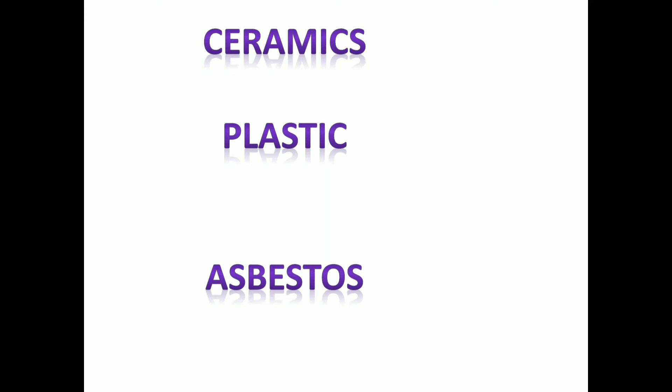In this video, I will be covering certain miscellaneous building materials used in the building industry. That includes ceramic, plastic, asbestos. First of all, coming to ceramics. Ceramics are the articles that are made by potters or the articles that are made from potter's earth. They can be clay products, refractories, or glasses. Glasses we have already completed in the last video. So let's start with the clay products.

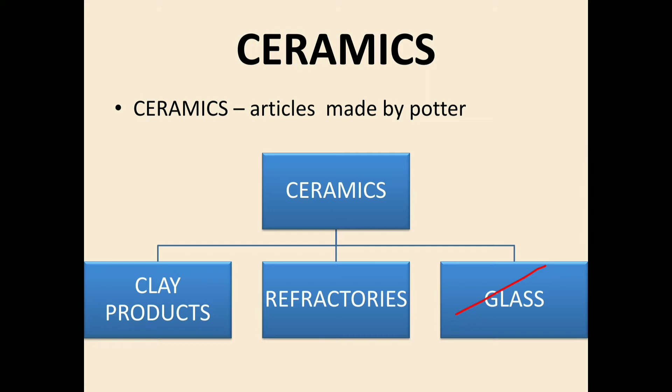Clay products include tiles, terracotta, earthenware, stoneware, porcelain and bricks. First one is tiles. We know it is used for various purposes in the building industry. They are thinner than bricks. The manufacturing process is somewhat the same as that of the brick. That means the first process is the preparation of clay, for which we have to select suitable clay which is free from impurities like grit, pebbles, alkalis, etc. They are taken to the pug mill and then they are ground well and made to suitable plasticity. Then for the process of molding, they are placed in molds that have a definite shape and pattern.

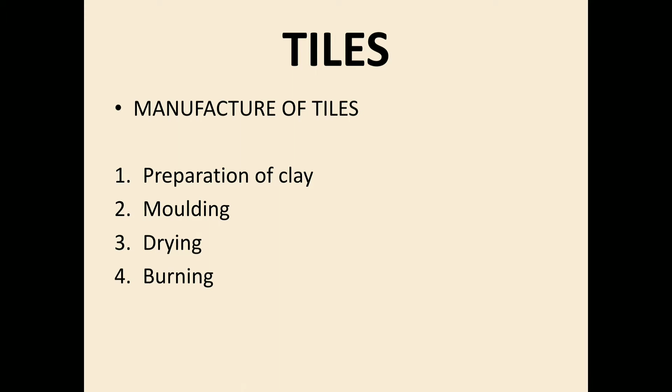Next process is drying. If you are naturally drying, it will lead to least warping of the tiles. Last process is burning. Burning is done in kilns like in the bricks. The tiles that are obtained after the manufacturing process should not have any cracks or any bends. They should be well burnt and have a uniform color. Coming to the types of tiles, first one is the drain tiles, that are used in drainage pipes as a lining, or sometimes used for irrigation water pipes.

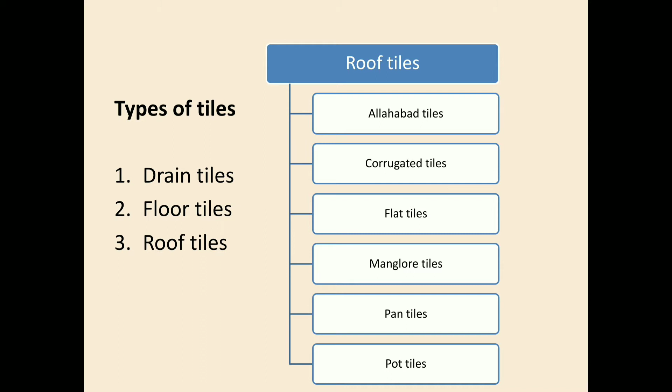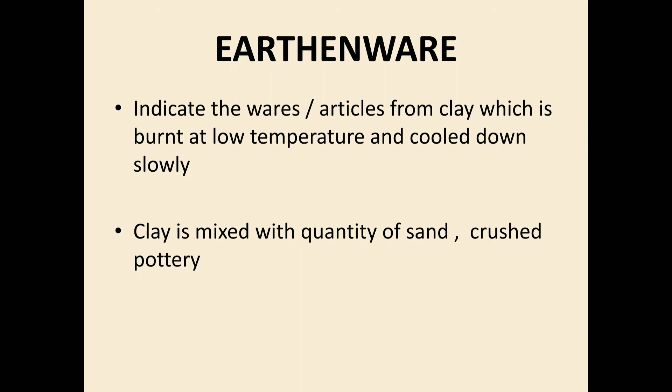Next one is the floor tiles that have a thickness of about 12 to 50 mm. Next one is the roof tiles that are used over the pitched roofs of houses or buildings. Roof tiles are of many varieties: Allahabad tiles, corrugated tiles, flat tiles, Mangalore tiles, pan tiles, pot tiles, etc. So that was about the tiles. Next one is earthenware. These indicate the wares or articles from clay which is burnt at low temperature and cooled down slowly. Usually, for making earthenware, clay is mixed with sand and crushed pottery. This will prevent the shrinkage of clay on drying and burning.

Next one is terracotta. The word terra means earth, cotta means baked. So terracotta means baked earth. It is a type of earthenware also. Its manufacturing process is the same as that of the tiles. The major use of terracotta is making hollow terracotta blocks that can be used for ornamental works, and sometimes it is used as a substitute for stones for decorative purposes.

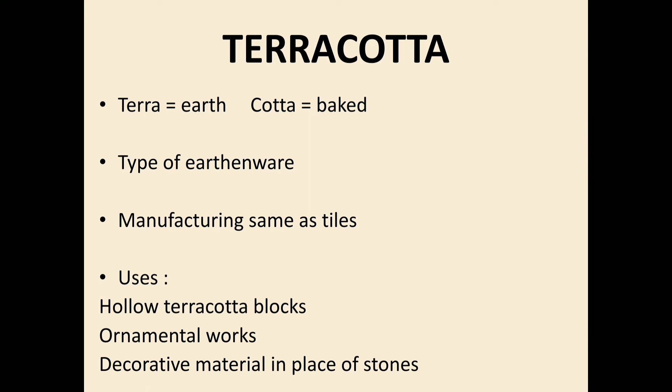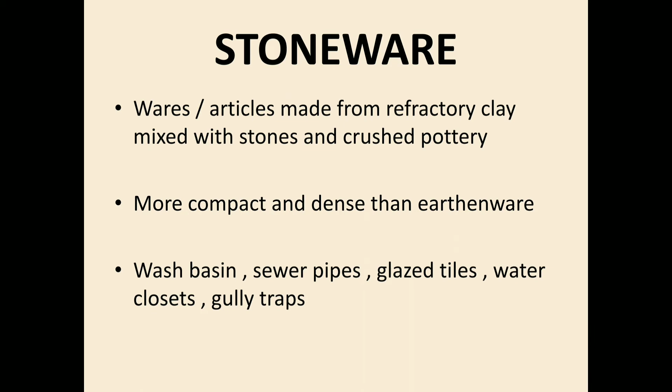Next one is stoneware. Wares or articles made from refractory clay by mixing it with stones and crushed pottery are called stoneware. They are more compact and dense than earthenware. It is used for making wash basins, sewer pipes, glazed tiles, water closets, gully traps, etc. So that was about stoneware. Next is porcelain. Porcelain we are very familiar with. It is a fine earthenware which is white, thin and semi-transparent in nature. Since its color is white, it is sometimes called whiteware also.

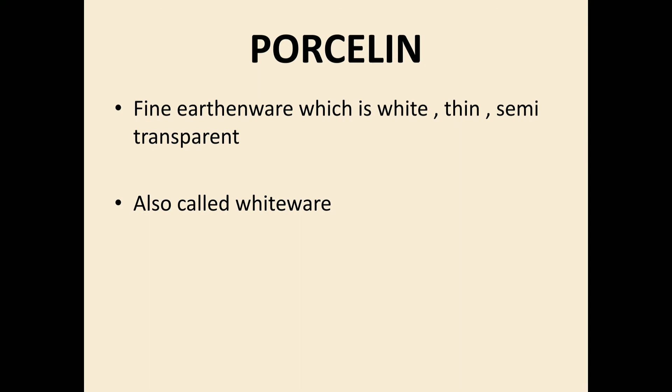Next type of ceramic material is the refractories. We have seen the refractory bricks in the bricks chapter.

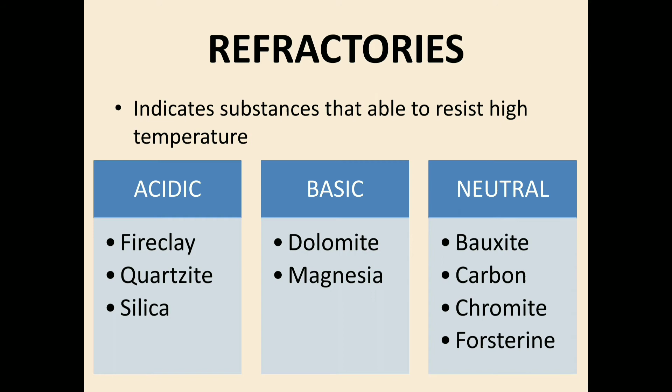Refractory indicates a substance that can resist very high temperature. So refractories are substances that can resist very high temperature. Based on their chemical properties, they can be classified into acidic, basic and neutral. Examples of acidic refractories are fire clay, quartzite, silica. Basic examples are dolomite, magnesia. Neutral: bauxite, carbon, chromite, forsterite. These examples are important. So that was all about ceramics.

Next miscellaneous material is plastic. As a definition, plastic is an organic substance consisting of natural and synthetic binders or resins with or without some molding compounds. It is a synthetic organic material having the property of being plastic at some stage of manufacture, when it can be molded to the required size and shape. Usually they are compounds of carbon with other elements like hydrogen, nitrogen and oxygen.

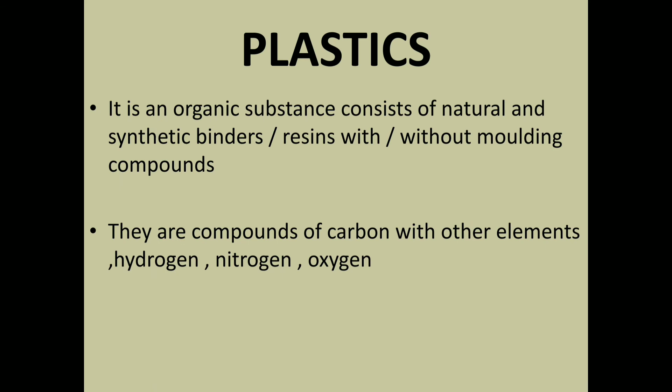Coming to the classification of plastic. There are many classifications like homogeneous plastic, heterogeneous plastic and all. These are not so important from the exam point of view. I have given a classification which is important for competitive exams, that is the classification based on the behavior of plastic while heating: thermoplastic and thermosetting plastic. In thermoplastic, the linkage between the molecules is very weak, so they get softened easily on heating, and this property helps us to reuse thermoplastic. Examples are bitumen, cellulose, shellac, etc.

But thermosetting plastics are heat convertible. They need a moderate heat condition and great pressure during the shaping process. When heated, cross-linking forms between the molecules and a chemical reaction also takes place. This change is irreversible. Thus, thermosetting plastic cannot be reused. For example, bakelite. Bakelite is an example of thermosetting plastic.

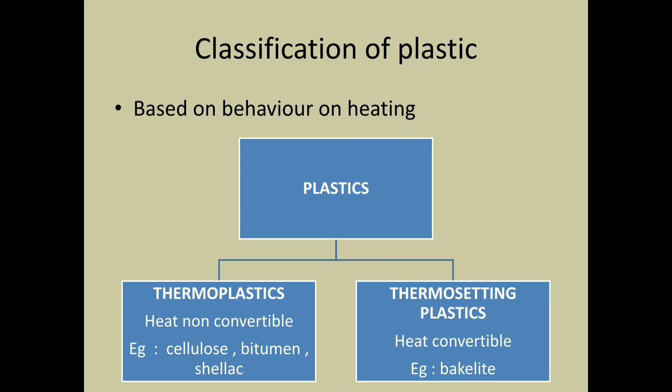Next one is asbestos. It is a naturally occurring fibrous material. It consists of hydrous silicates of calcium and magnesium. It is used for making asbestos cement that can be used for many purposes, and also we are familiar with asbestos paints. Asbestos is used for insulating boilers and coverings, and as a covering material for magnetic coils. So that is about asbestos.

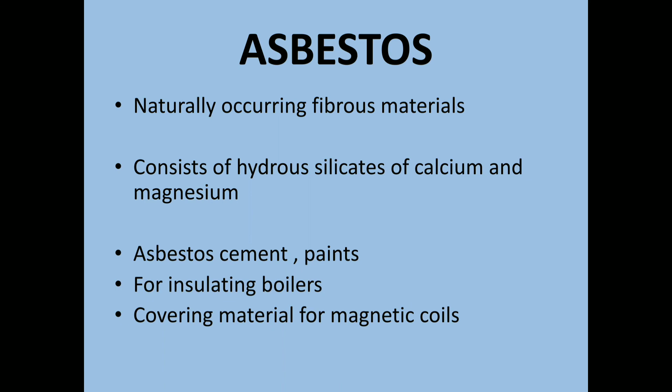So we have covered almost all the miscellaneous building materials. I know I haven't covered bitumen, tar, asphalt and all. That will be covered in the transportation chapter. Next video will be on the next building material, that is lime.